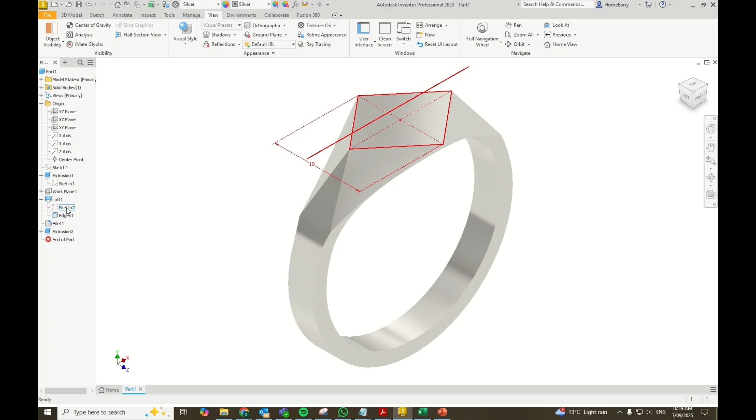Welcome back. In the last video I showed you how to make this diamond shaped signet ring, and what I'm going to do with this quick video is just show you how you can change the shape on top to make any shape you like. So what I'm going to do here is go back to this sketch, which was the sketch of the diamond shape, and this time I'm going to make it into a circle.

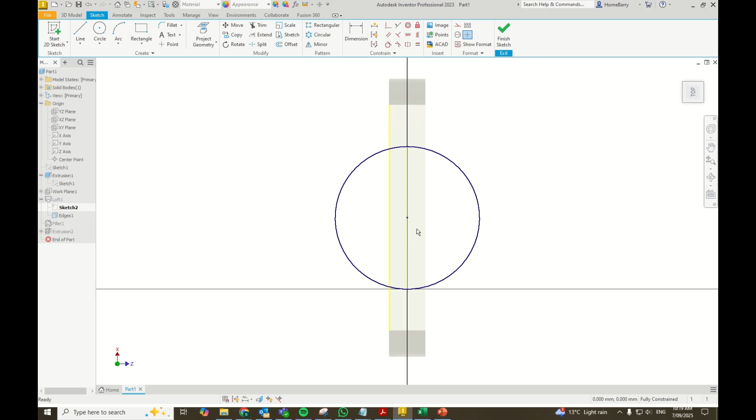Alright, so from here out to here, I'm going to get rid of these lines. And that one there, don't need that anymore. And then finish the sketch.

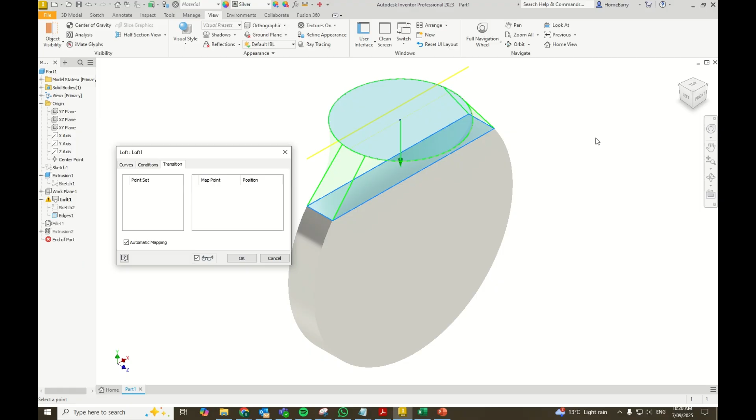Now you can see that it doesn't like it very much because I have to go through and change a few things about my loft. So if I go back to my loft feature, so it's chosen the circle here and that plane, so it's got the two planes there. But when I do my transitions, I need to do that to start with, so that this will automatically map them.

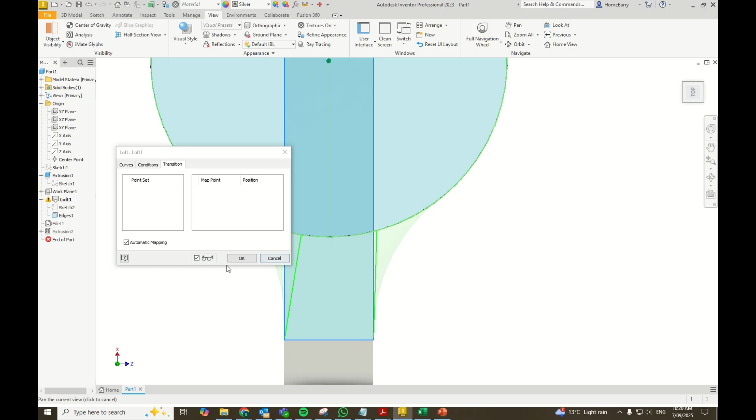But if you have a look, you can see that it hasn't done this right. So that one is correct, okay, and you can see a straight line between there, and this one is correct there, but on this side it's going on a funny wacky angle, and I don't really know why Inventor does this, but it does. So what we need to do is to take off the automatic mapping again and find that line and just correct it.

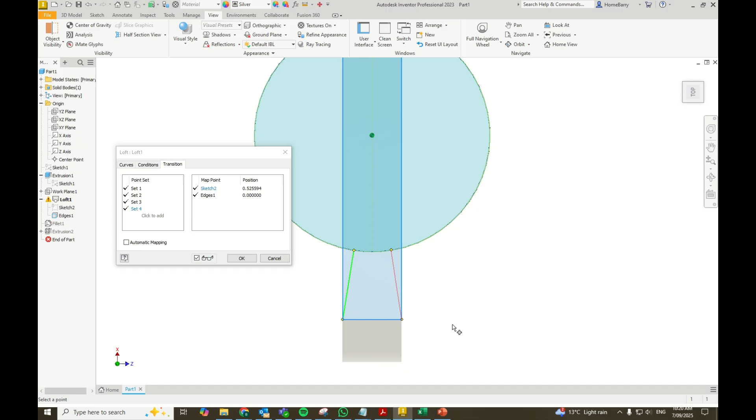So we're going to bring it in about there, like that. Okay, and so now that looks better. What you're looking for is a straight line, as I said, between there and there.

Alright, so if I do that, then I've still got some errors here, so I'm going to accept that and see what happens. So for some reason it doesn't like the fillet, although that fillet looks pretty good to me, but maybe the radius is just too big.

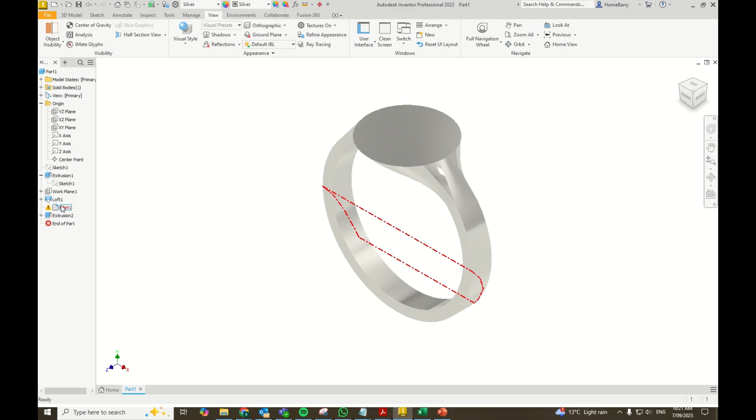So let's go back to the fillet again, and it's got 6 edges, so I'm just going to get rid of those edges and then select the edges again. So I want that one and that one, and clearly the 10mm is too much for this shape ring.

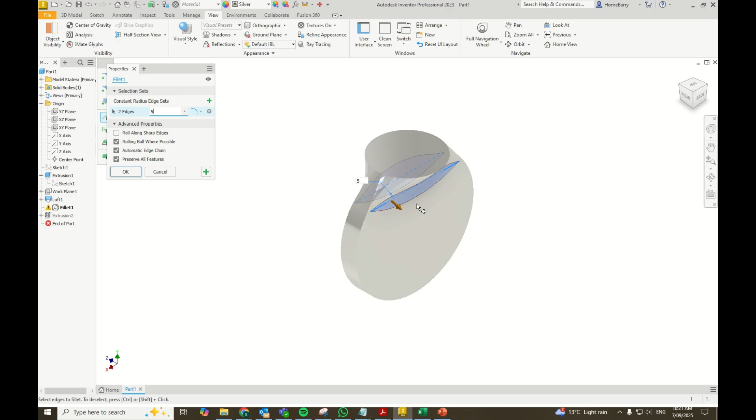So let's go to a 5, and you can see now it's done that. So we just make that 6, and then 7.

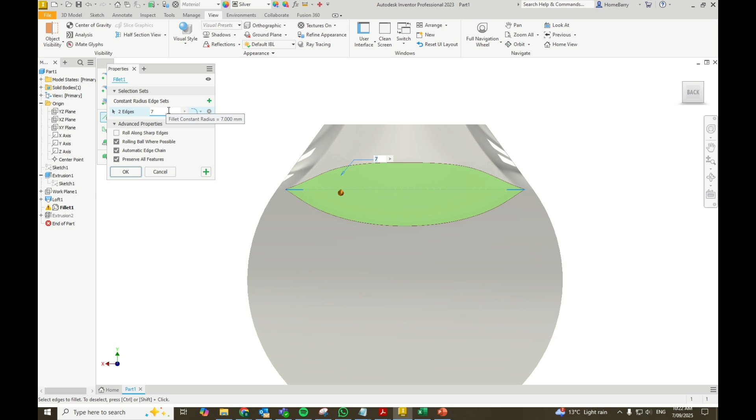Okay, and I think as soon as that starts going over the limit, just keep pushing it and see how far we can get it. Okay, so 8 is as big as we can go with that, so let's go with an 8.

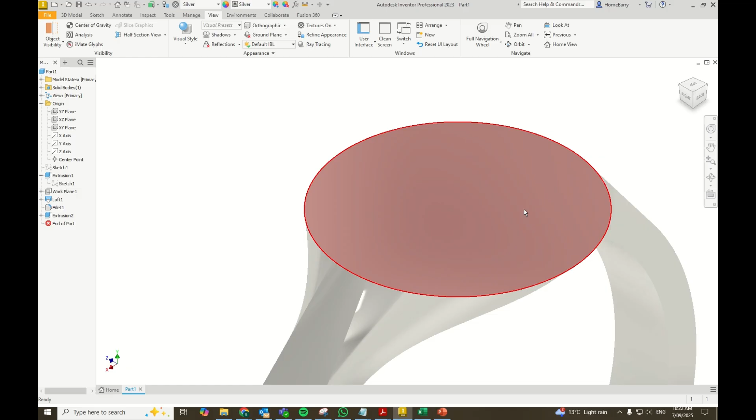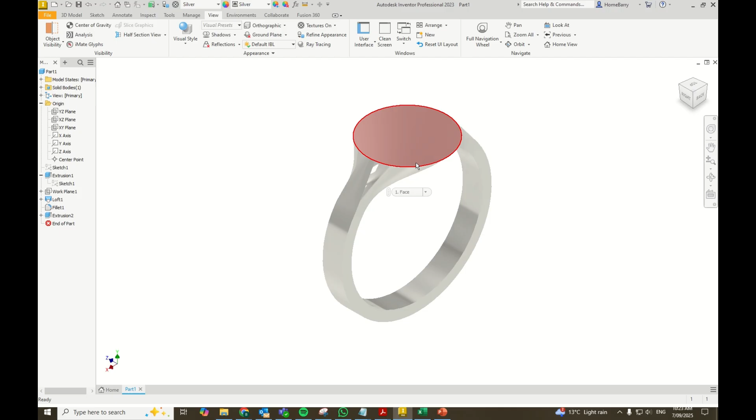Alright, and then OK, and now you can see that we've got a nice round shape on the fillet, on the signet ring. Alright, so pretty much using this method you can make whatever shape you like on top. It could be an oval, could be a hexagon, anything you like. Just have to watch for the transition points, work out where you want the transition points to go, or the transition lines between for the loft, and then you are free to make any shape you like for your signet ring.